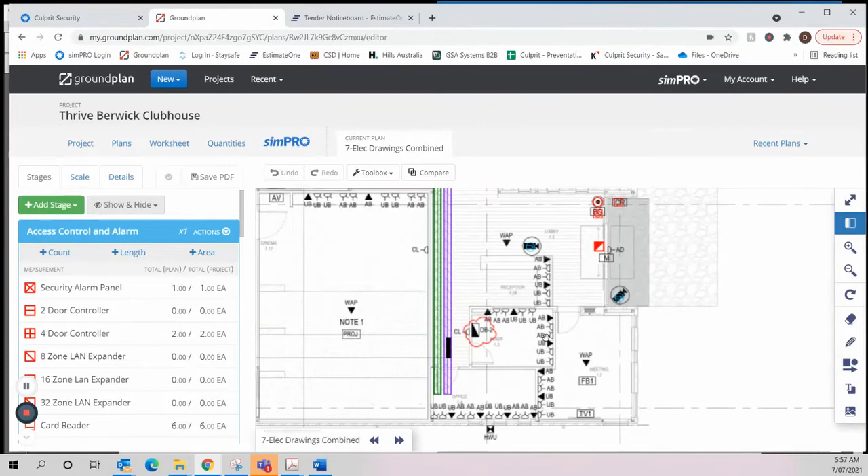FIP interface. So if there's an FIP interface shown, then we just drop the symbol on there. So we've got an FIP interface symbol, and we drop it on there, and then we just know that there's an FIP interface.

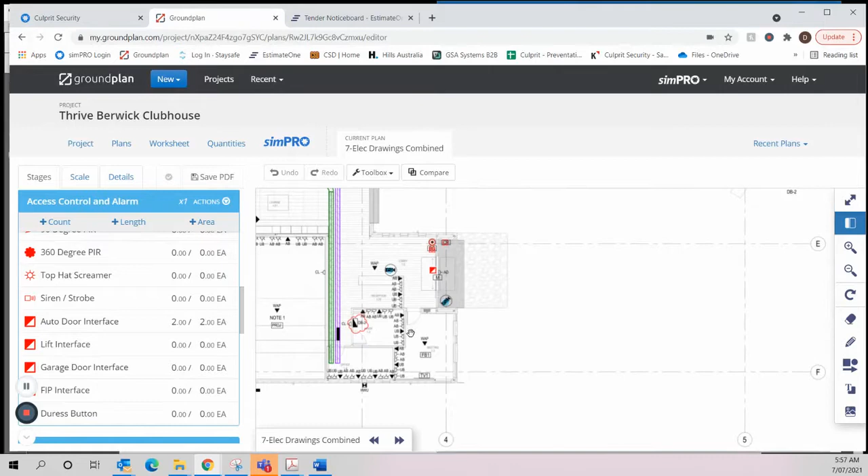So FIP is Fire Indicator Panel. We integrate with the Fire Indicator Panel to unlock doors in the event of a general fire alarm. We can also have a look on the fire lighting and fire drawings.

So you can see lighting fire alarm, and the FIP will be shown on this drawing, definitely. If you do not see FIP, then there's no FIP. It doesn't have to have an FIP. As I said, typically this type of construction won't have a fire indicator panel.

Nope, I don't believe there's an FIP on this drawing. Typically, you'd be near the main entrance. It's a serviceable product, and it's normally near the main entrance, so it's a good place to look. You can see there's a fire reel symbol here, so that says to me there's no FIP here.

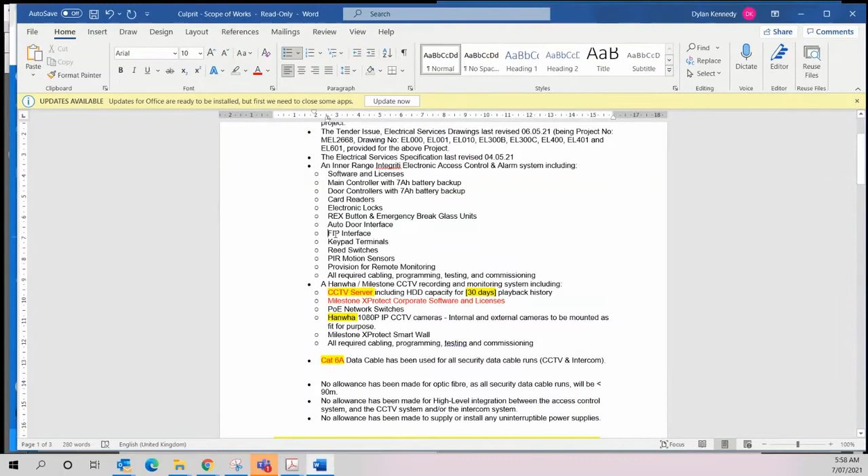So back over to our scope of works, and we're going to select the FIP interface. There's no alarm, there's no keypad terminals. We didn't put a drop in keypad symbols, so we can get rid of that.

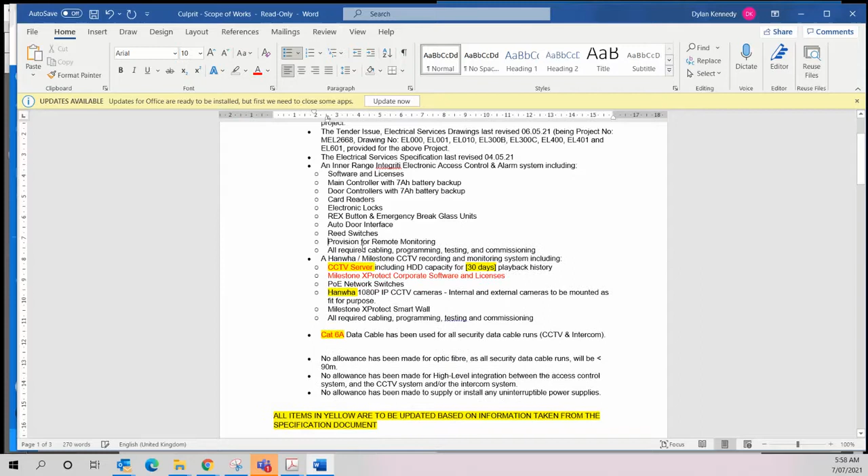There is reed switches, so we're going to leave that on there. There's no PIR motion sensors, provision for remote monitoring. So we'll get that information from the specification.

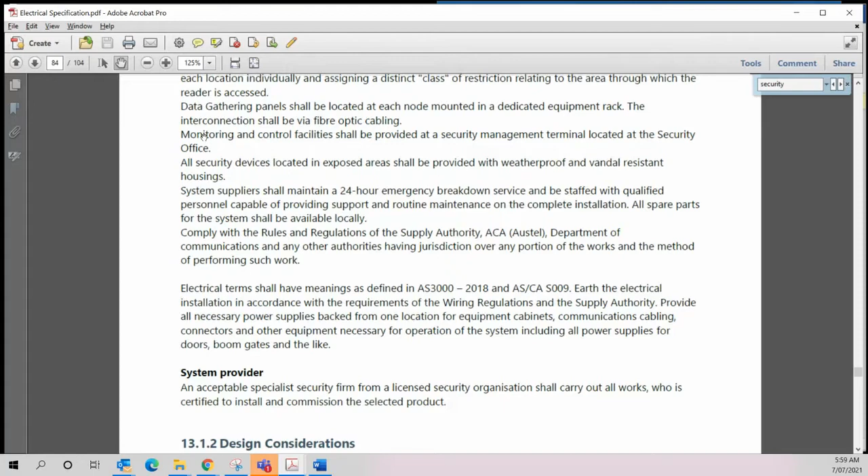So we're going to look through here. So there's a note around monitoring. Just scroll through.

Next page. So fail-safe operation, battery backup for secure locking. So that's when we're looking at our scope of works. You can see we've got battery backup, so we've got that covered.

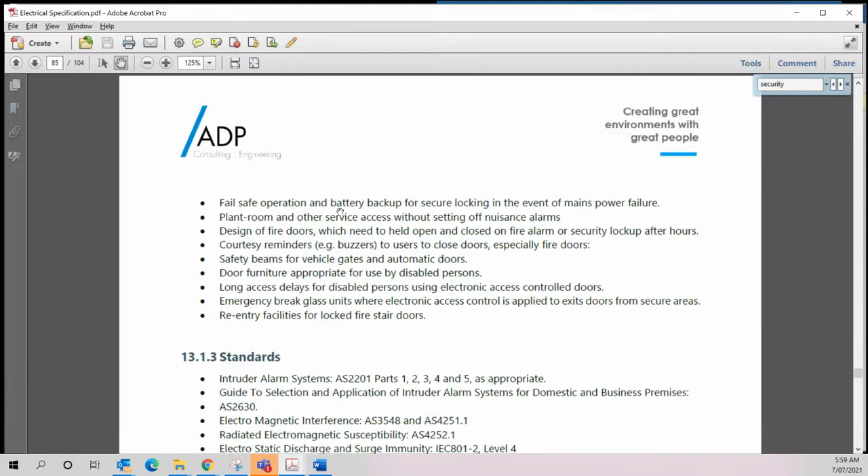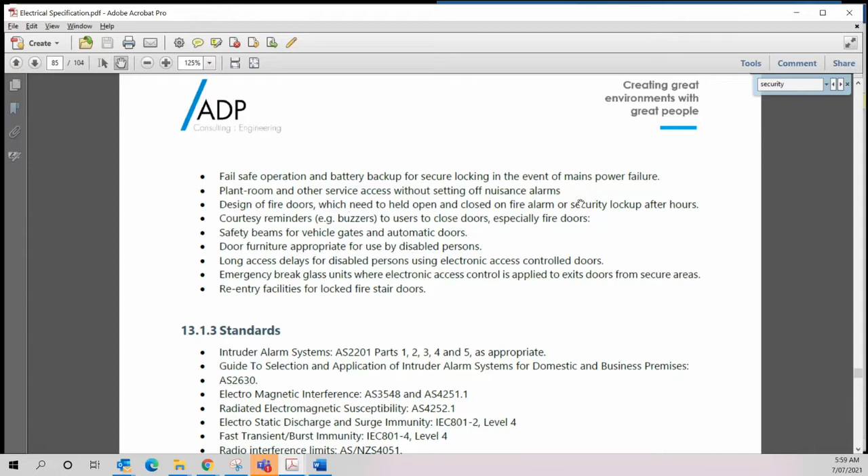So you can see that they've got design of fire doors which need to be held open and closed on fire alarm or security lockup after hours. Now, there is no fire alarm. This is what I mentioned about copy and paste or very generic specifications. So they will mention things that typically aren't included on the drawings, but for those kind of things, we'll just go by the drawings.

Safety beams for vehicle gates, there's none of those. Automatic doors, well, that'll be done by the automatic door contractor, so we don't have to worry about that kind of thing.

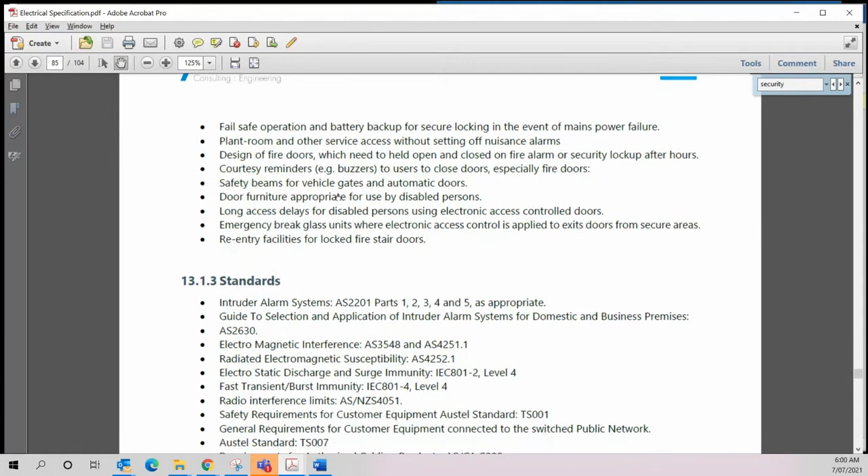Emergency break glass units, we've got that. And re-entry to lock fire stair doors. So there's no fire stair doors on this job. So this is once again just a copy and paste and something that we don't have to, is not relevant in this situation.

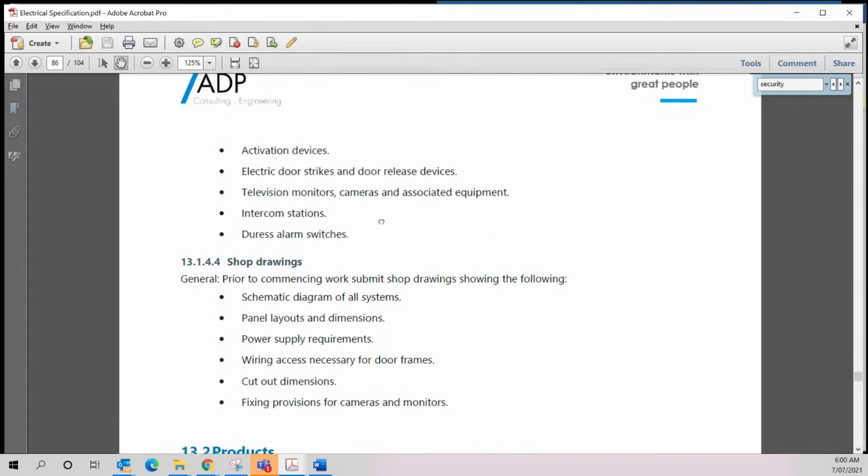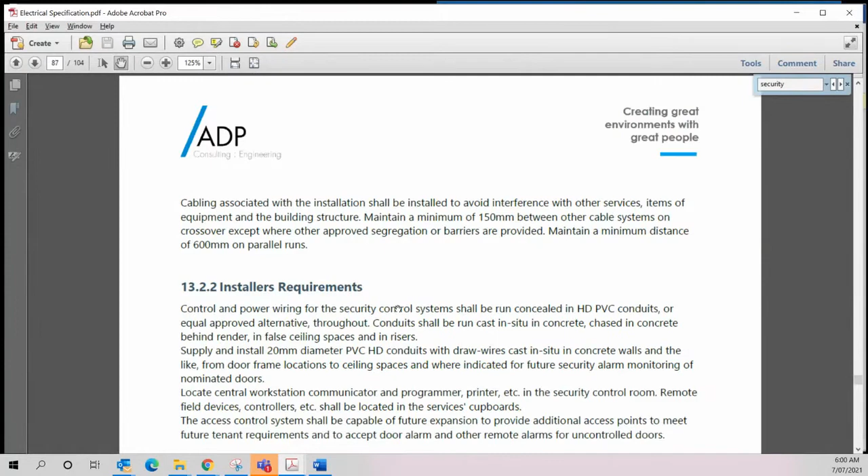I'll just scroll through. So that was just all our cable tray catenary systems, don't have to worry about any of that. We just use our usual typical item, so not something for us to worry about.

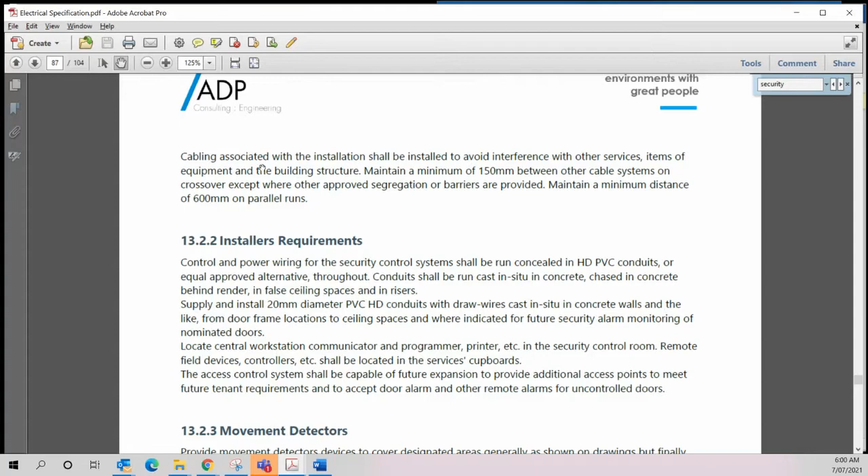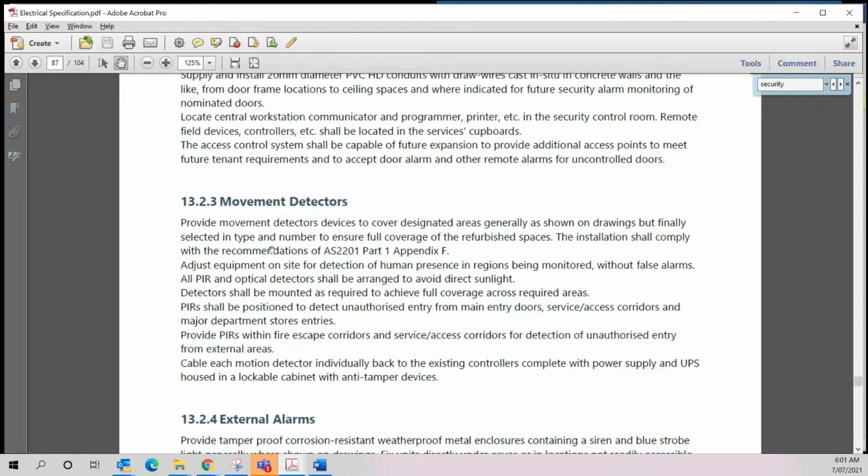There is sometimes we do have to look at that kind of thing, and I'll run through that another time. Talking about PVC conduits, movement detectors would be PIRs. There's no PIRs shown from a security perspective, so we don't have to worry about any of those.

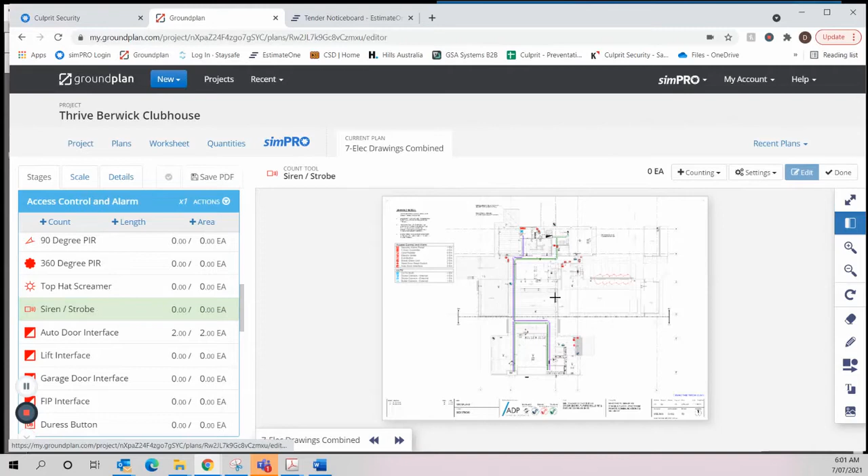External alarms, there's no external alarm shown on the drawing, so we're not going to worry about that. That's what we would use a siren strobe. So I'll show you, I will show you that just so you understand where we're using those. So down here you'll see siren strobe. So if there's a siren strobe shown on the drawing, we'll just drop it on there. There isn't one on this one, so we're not going to worry about it. Alarm circuit supervision.

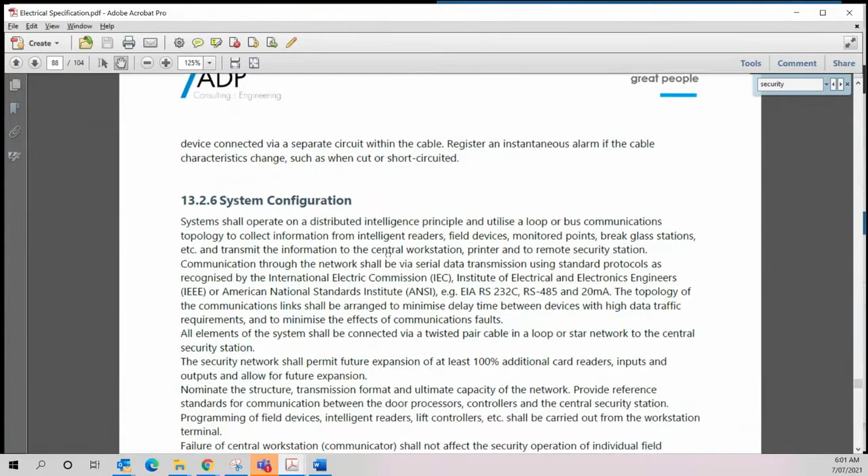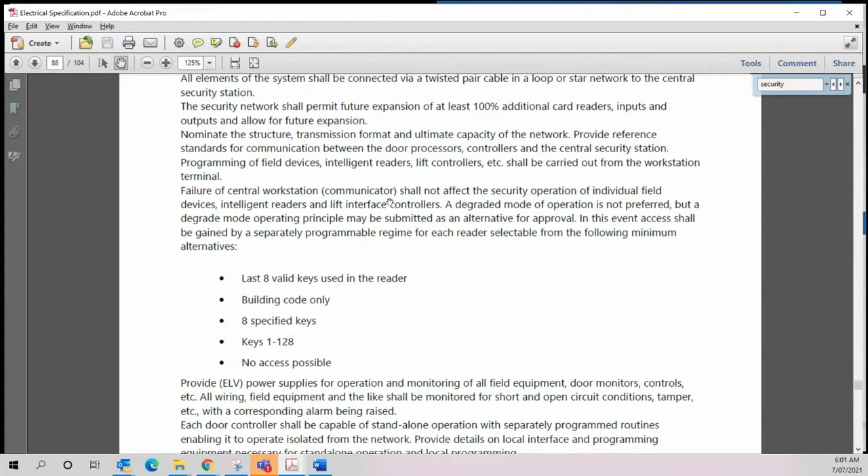This just talks about the type of system and its minimum requirements, which Integriti will meet all of those, so we don't have to worry about any of that.

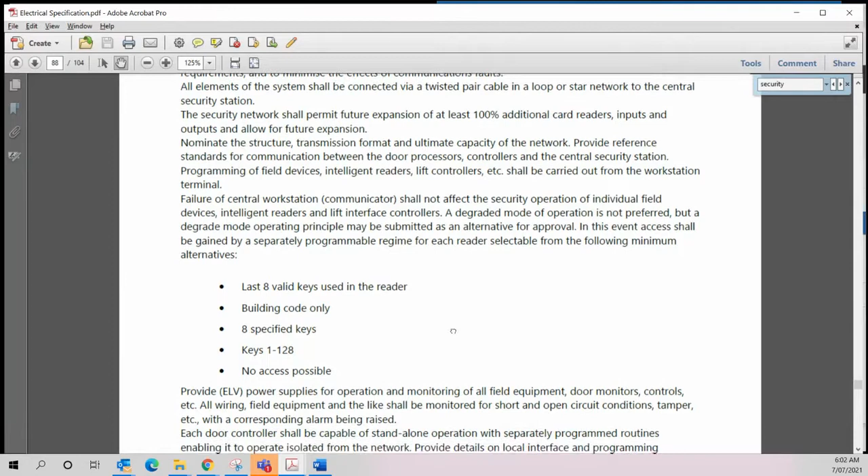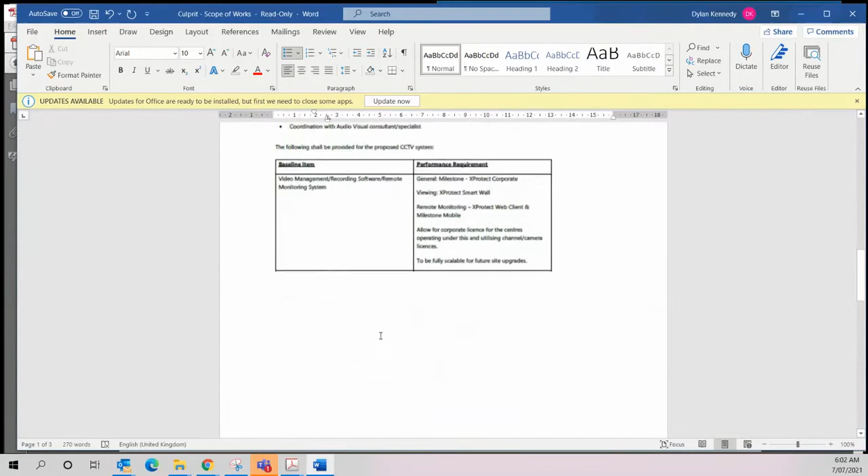Just have a quick read through here. It talks about where push buttons are required, mushroom head, so that's fine. We'll use mushroom head plates, that's mushroom head push buttons we always do, unless it says to use something different.

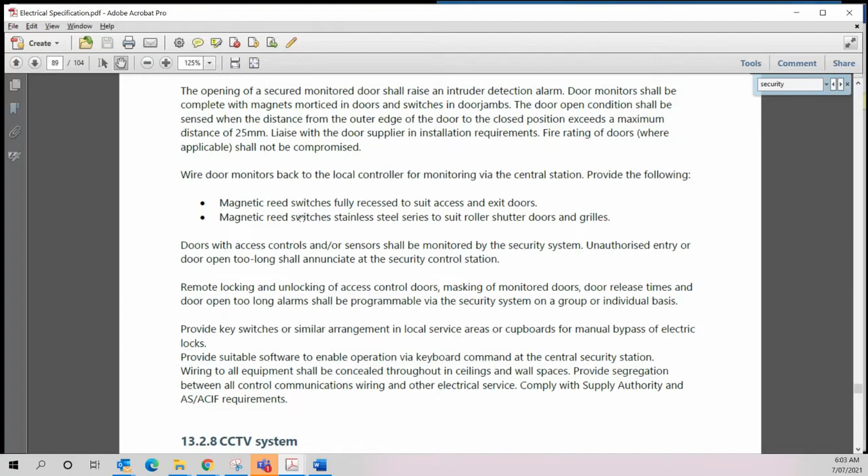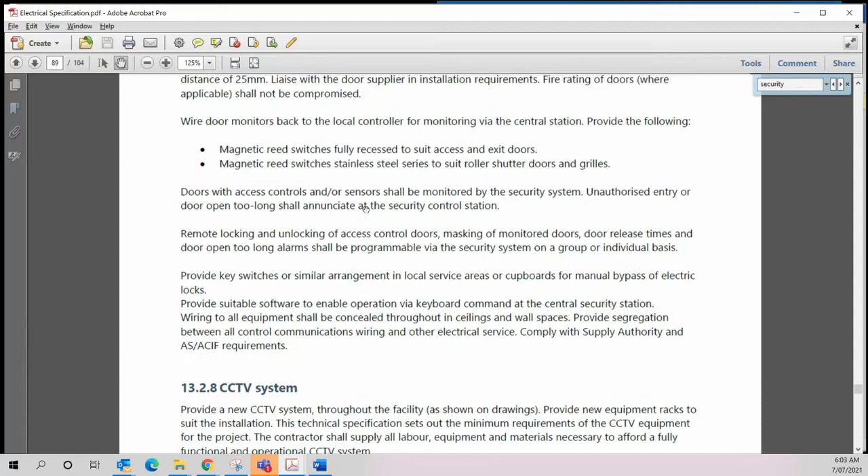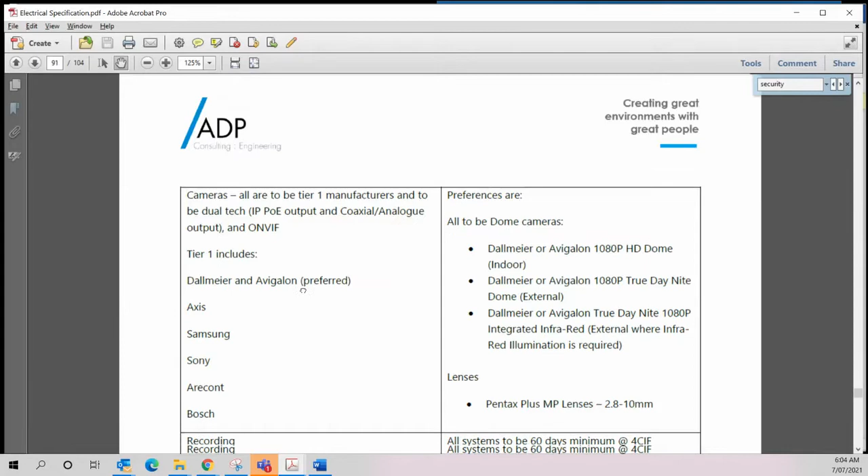So all of this information is relevant, but it's also very generic and typical of specifications. And then we're right on the CCTV system. So I'll just scroll through quickly one more time just to make sure there's nothing else about alarm and access control.

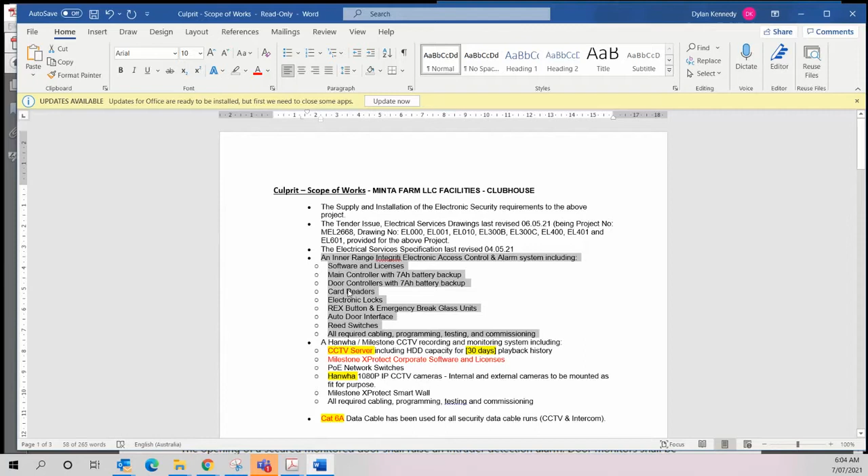Which there's not. So what we can do is, back on our scope of works, we'll take out provision for remote monitoring, all required cabling, programming, testing, commissioning. So we've now completed our access control alarm scope of works, and that's got all the information we need to be able to use.

Then we move on to CCTV. So Hanwha / Milestone CCTV recording and monitoring system, including CCTV server, including HDD with 30 days playback history. So I'll show you where we get all this information, and I did run through this briefly in another video, but I'll cover it again.

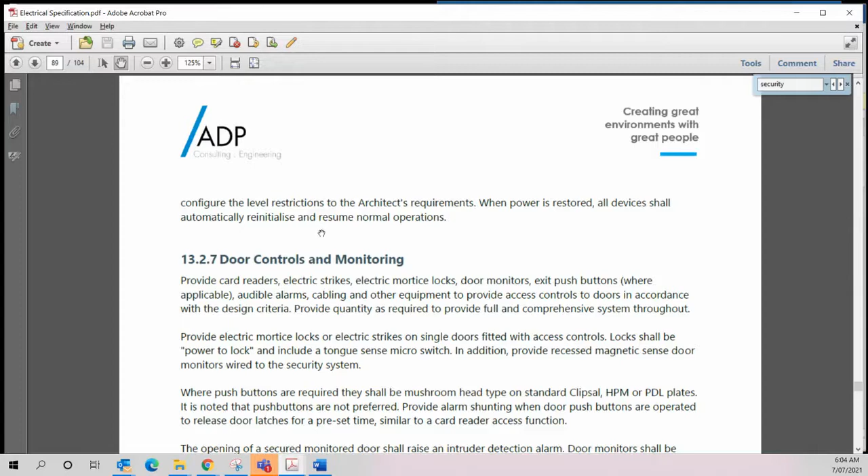So that takes us over to CCTV. I'll show you, it starts down here. CCTV through, provide new equipment racks to suit the installation. So we will look at the equipment racks. We would typically exclude, and I'll show you why, on this.

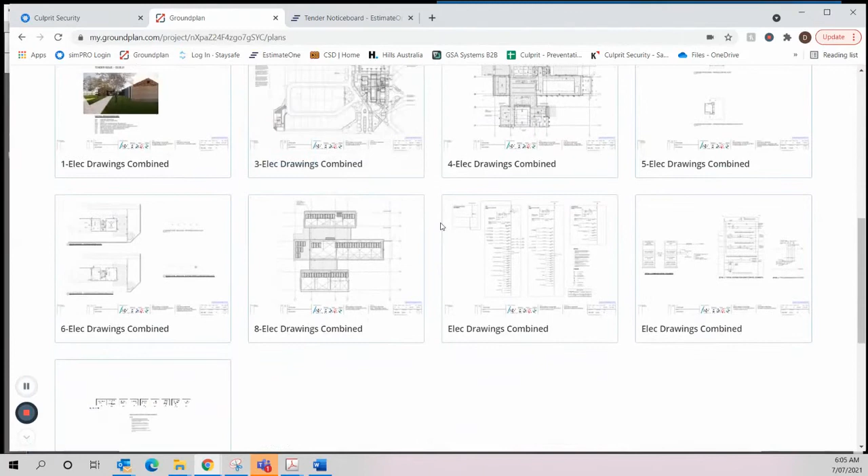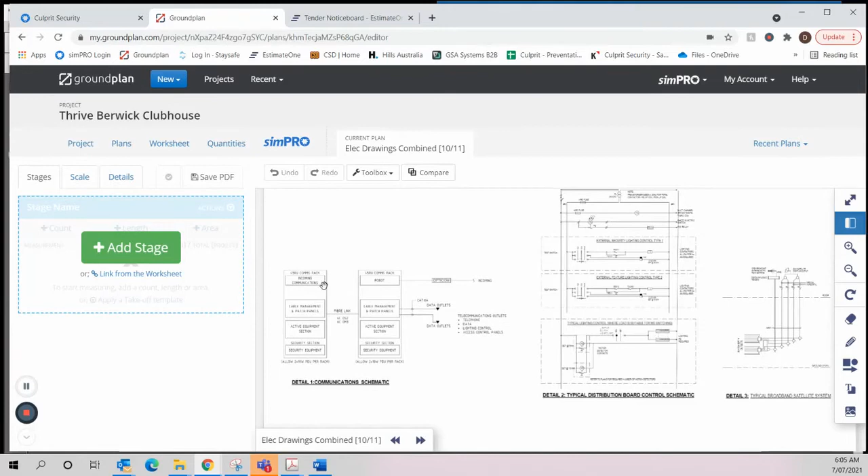We have a communication schematic. So there's two 45RU comms racks with incoming communications, it's active equipment, and we've got this small section in the bottom. So what we'll do is exclude the communications racks because we're just taking up this small little space in the rack, and it will actually only be in one of the racks. It won't be in both. We don't have enough hardware to go in both of the racks, so it'll just be the recorder from the CCTV going in one of the racks.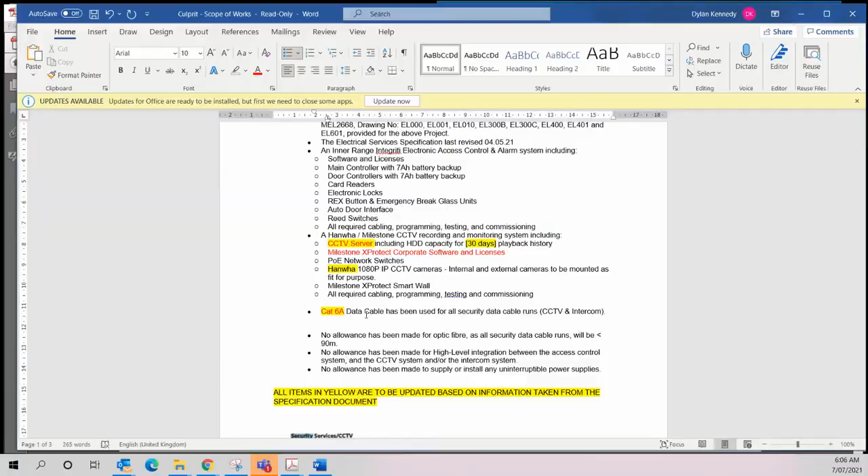Based on that, we will exclude the communications racks, so that's what we're going to do. Provide new equipment racks to suit the installation - I'm going to go into here and just say no allowance has been made for equipment racks. That's just stating in quite simple terms that we are not going to be providing any equipment racks to suit this, and that's all we need to say.

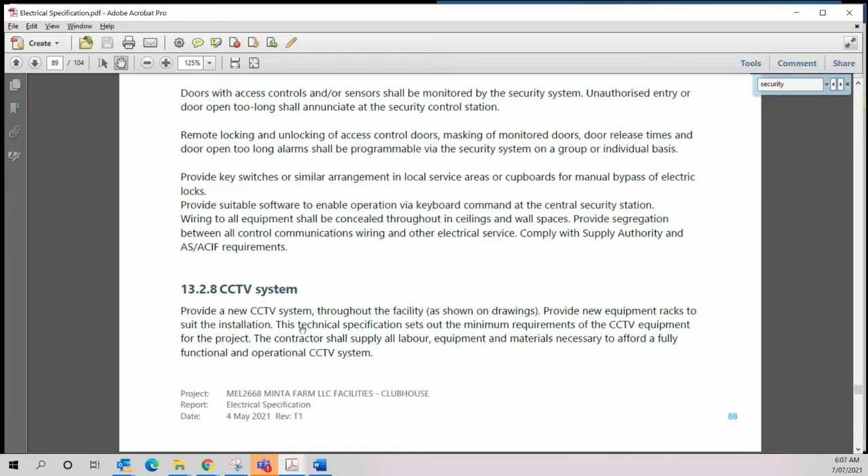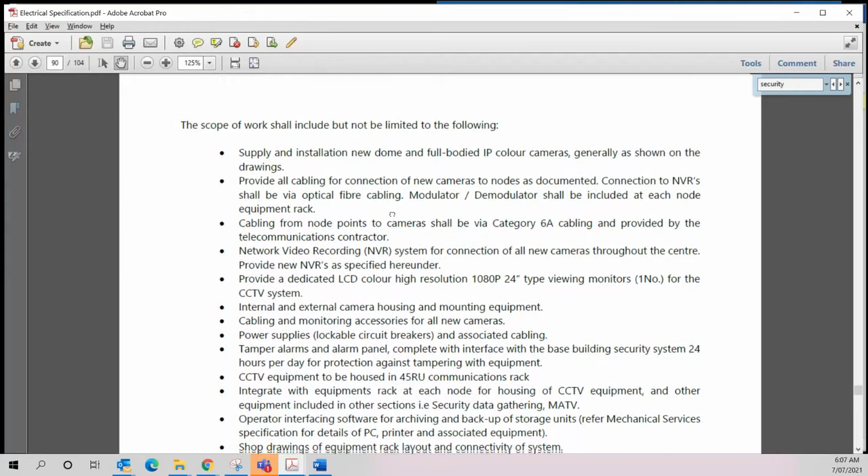Nothing else there, that's all relevant. Supply and installation, new dome, full-bodied IP color cameras, so that's fine. All cabling, yes. Cabling from node points to cameras shall be via category 6A cabling. So we just need to make sure we've got a node for the category 6A, which I believe we did. So there it is.

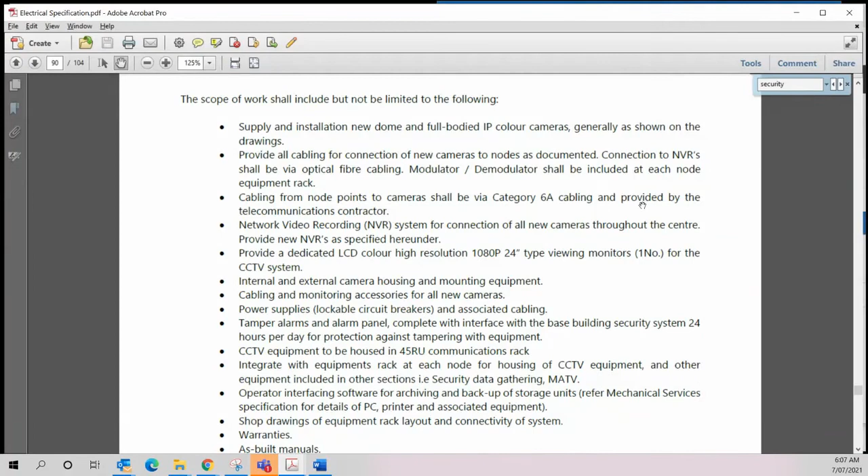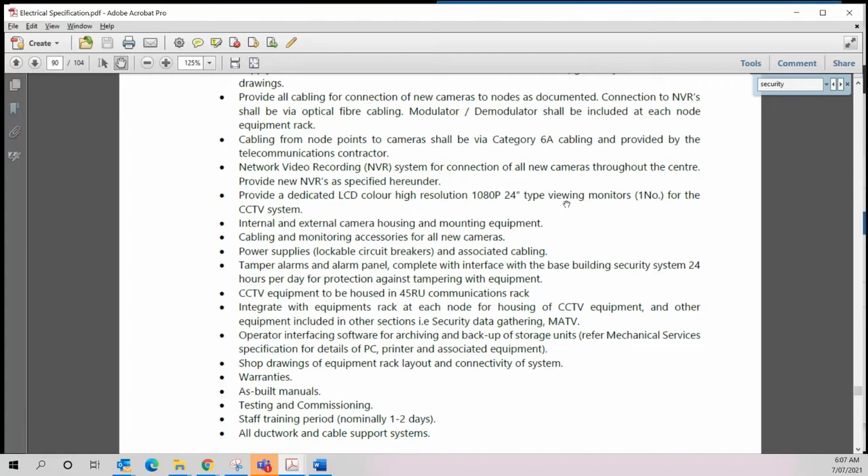Network video recording, so that's fine. Provide dedicated LCD color, high resolution, 1080p, 24-inch type viewing monitor. So we're going to go and add that in. Although it's got a Milestone XProtect Smart Wall, it does contradict itself, so we're going to take this scope of works here as, I guess, taking precedence. So we're going to include a 24-inch CCTV monitor.

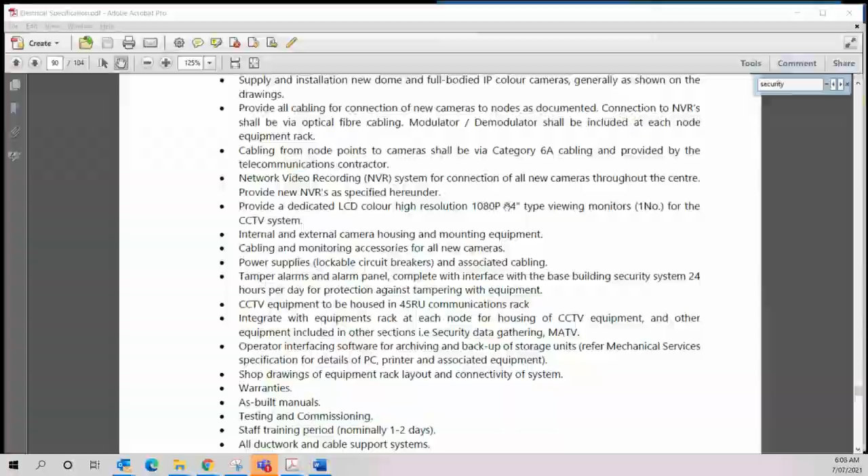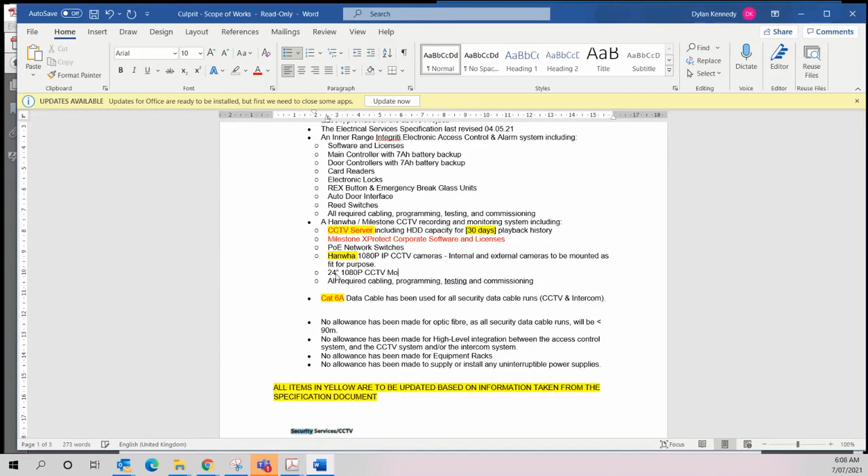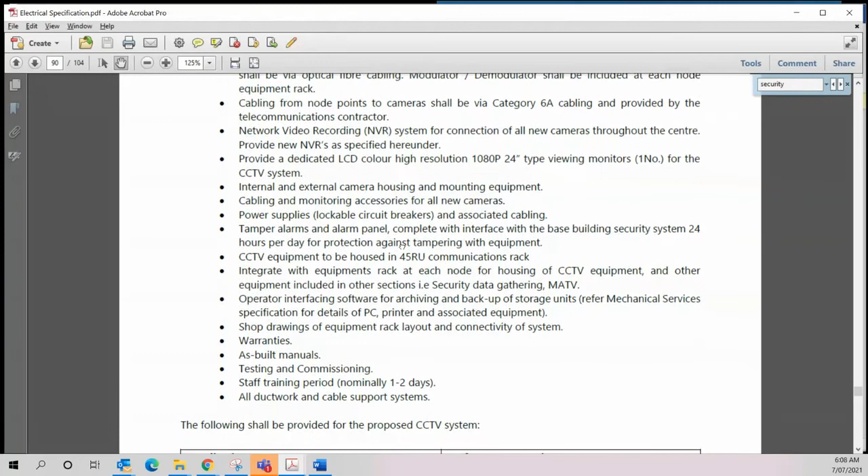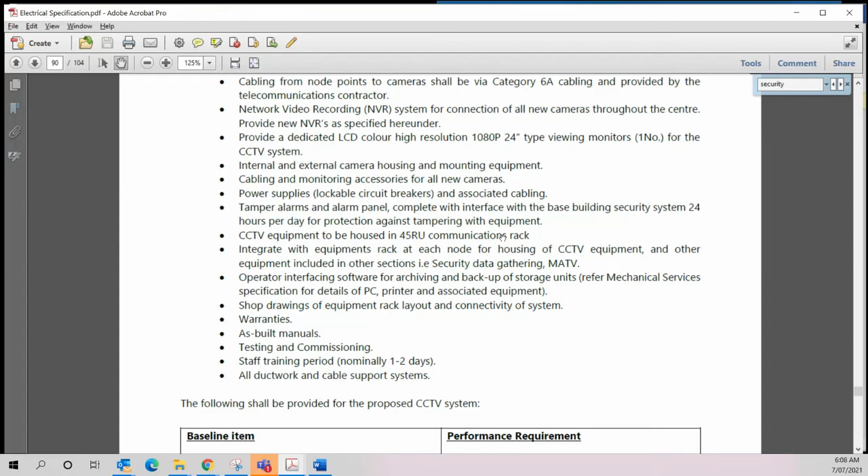We're going to get rid of that. It's all pretty generic stuff. CCTV housing, 45RU communications rack - we mentioned that before, we're going to exclude that, so I don't need to worry about that.

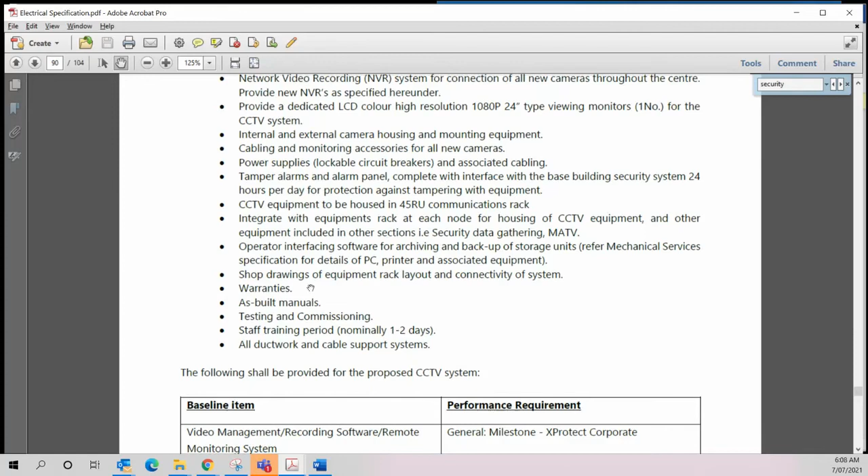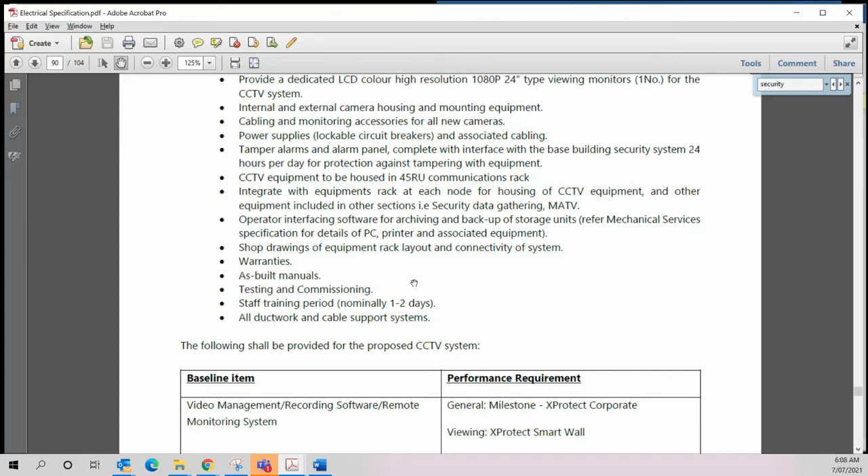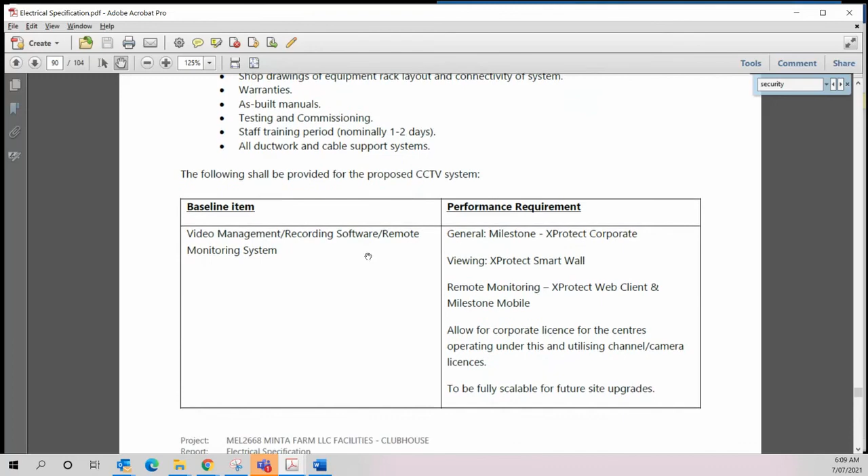A lot of this stuff is very generic and has come from other specifications. So we'll have shop drawings, that's fine. All warranties, as-built, testing, commissioning, that's all normal and typical of all our installations. Milestone XProtect Corporate, so we made a note of that.